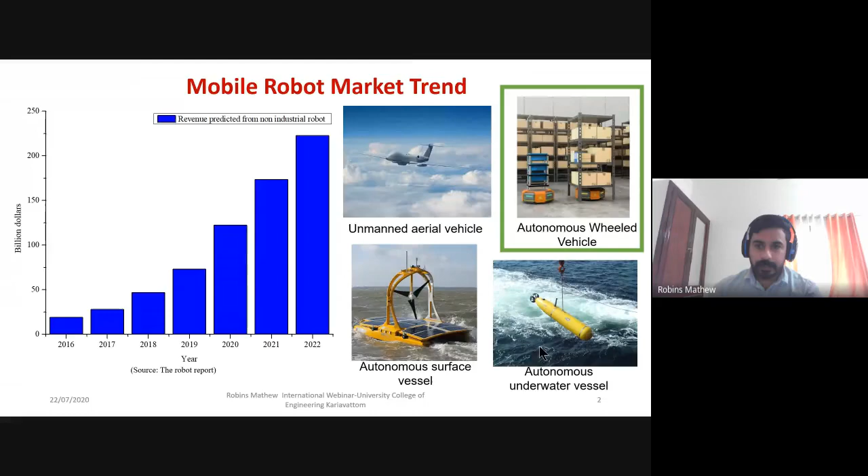However, the methods and other strategies which I discuss in this presentation will be applicable for other types of mobile robots, such as unmanned aerial vehicles, surface vessels, or underwater vessels. But I'll be using images of wheel mobile robots. So keep this in mind.

Coming to the major milestones in case of wheel mobile robots: research started in the 1950s, and by 2020 you have autonomous trucks and cars in the market. This research started with a very small scale robot used for a different purpose, not for actually controlling the robot as such. It was used for some other purpose in the 1950s, and in the 1960s, Stanford University came up with an autonomous vehicle, shown in this figure. It's like a puller cart, which we use for moving vegetables or other things in India.

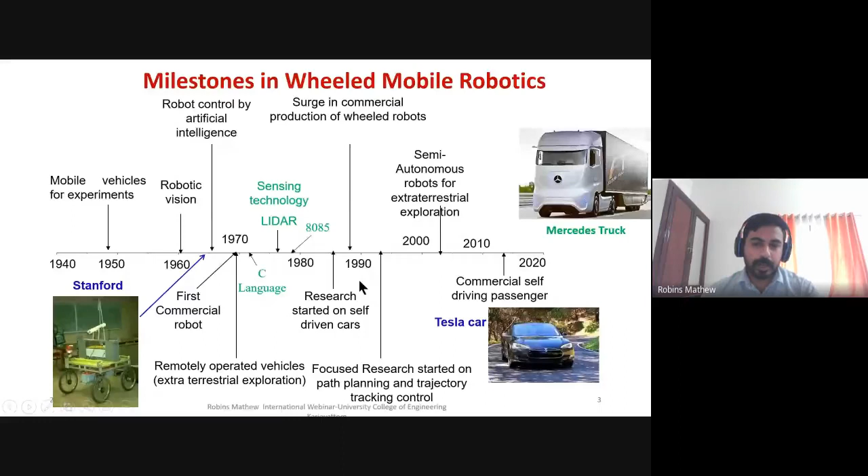When coming to wheel mobile robots, again there are different types, like the omnidirectional robot, where you have a robot with three wheels arranged on either side at 120 degrees in the body of the robot, and these wheels are specially made. It can be moved linearly in a straight direction, or in the lateral direction, using rollers attached to the wheels. By moving each wheel at a particular velocity, you can actually move the robot in any direction. So by controlling individual wheels, you can control the motion of the robot.

In case of the synchro drive robot, you have a normal wheel which is rotatable, and this wheel is arranged in a mechanism which can be used for turning the wheels. So by turning the wheels and rotating the wheels, you can move the robot in any direction.

Then you have the steerable wheel robot, where you have powered rear wheels. This is a car-like robot. Steerable wheel robots are car-like robots. You have powered wheels, and then you have steerable wheels. By steering these wheels, you can make the robot move in a particular direction.

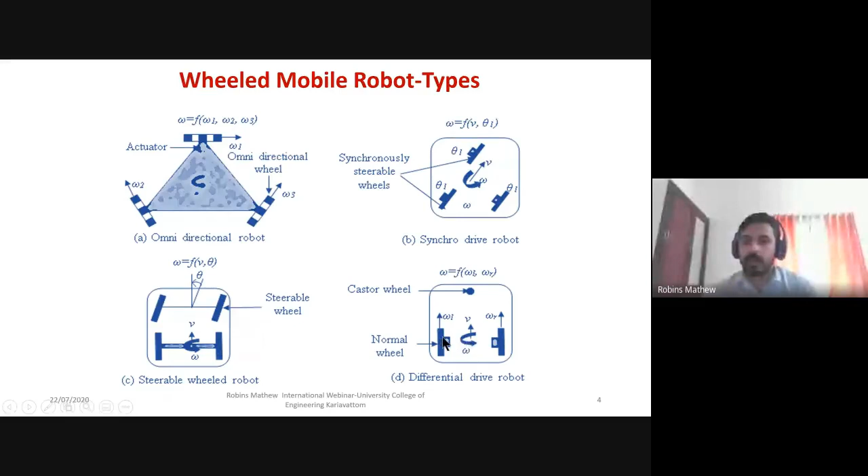Then you have the differential drive robot, where the motion of the robot is controlled by controlling the independently actuated wheels. So by controlling these two independently actuated wheels, you can control how the robot is moving.

The application sectors of wheeled mobile robots, as well as other wheeled vehicles, are in healthcare, agriculture, consumer goods, mining, defense and security and surveillance, transportation, etc.

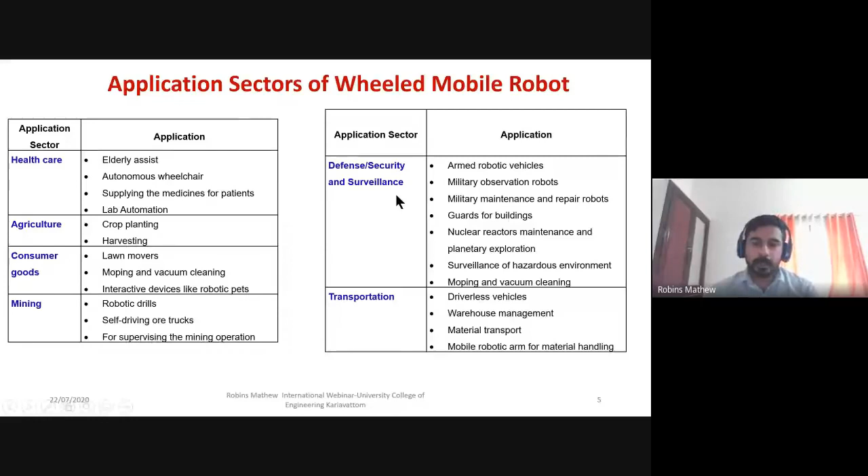So what is the market prediction? It shows an exponential increase both in the revenue as well as the application. Within 3 years, the use of mobile robots will grow by 300%. We expect that mobile robots will be available in our homes within 5 years. You may think I'm over-predicting, but it's actually the situation here.

Now we have robots like floor cleaning robots already available in the market within a price tag of 20,000 to 30,000 rupees. Anybody can purchase these robots. This price is going to reduce within 5 years and it will come around 10 to 20,000 rupees range, so anybody can purchase a robot.

And when I say these robots are going to be in your homes, I mean robots like floor cleaning robots, elderly assist robots, or any other human assistance robot, like lawn mowing robots. These robots will be available in the market within 5 years and will be there in your homes as well.

Coming to the relevance of these robots in a current pandemic kind of situation: in this situation you have a limited number of human resources available in the field, in your factories and automated facilities, other manufacturing facilities. This problem is especially faced by the biomanufacturing sector or bioprocessing labs where you need human presence to do the experiments and develop the products.

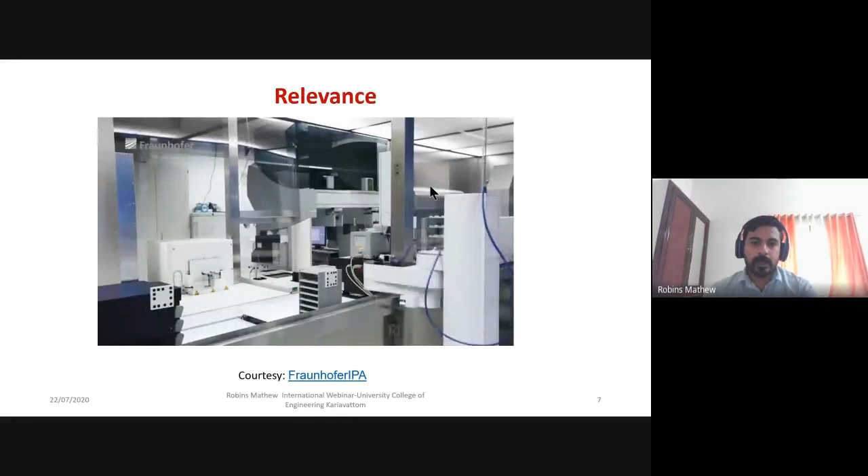You can see this robot developed by Fraunhofer, assisting a human in testing samples, taking the samples to another place, keeping the samples in an incubation facility, and moving it back to the original position and so on. This is an autonomous robot that's already in the market, which could do many things autonomously.

You can see how it is avoiding obstacles and other things and then going to the required destination. So this is the relevance of robots, the use of robots in manufacturing facilities and other facilities, other than commercial consumer goods.

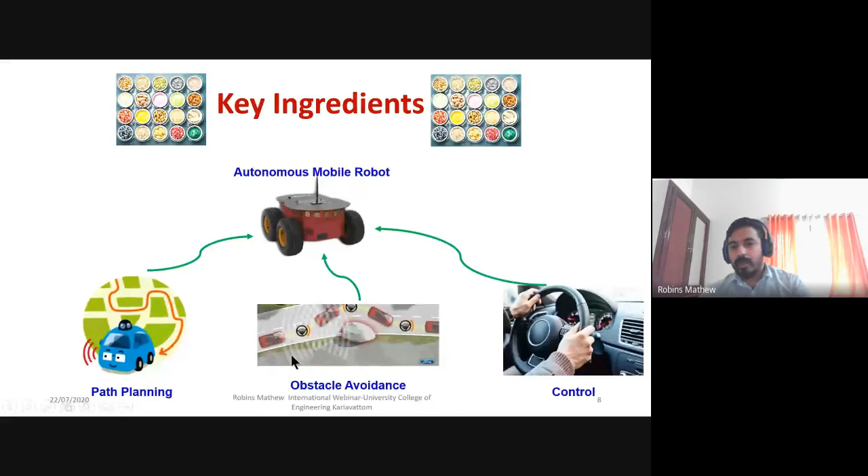So when you talk about autonomous wheeled mobile robots or any other robot, what are the key ingredients? For me, it is path planning, obstacle avoidance, and control. If you combine all these three together in a proper way, you can make the robot autonomous. I will explain each of these individual topics separately.

Coming to path planning, it's the process of finding a continuous and optimized path from a given initial position and orientation to a final position and orientation, avoiding obstacles. So you have a configuration space which consists of a starting point, a destination or goal point, and obstacles kept in between. We need to find the path from the starting point to the goal point.

There can be many paths like P1, P2, P3, P4, etc. However, we have to find out which is the most suitable path. P1 can be avoided because it passes through the obstacle. Then you have P2 and P3, which take a bigger route or move more distance than P4. So at last, the objective is to select P4. Somehow you have to find the path, then determine which is the optimized path.

Coming to the applications of path planning: when we talk about path planning, we always remember robot navigation. There are many other applications too—industrial robots can use path planning for pick and place operations or other tasks, and it's used in navigation apps like Google Maps. It's also used for finding how proteins are folded in biology, like how a chain of protein will fold and form a structure. Then you have the autonomous vehicle lane-changing problem, where again path planning is used, as well as animation in normal animation movies and other applications.

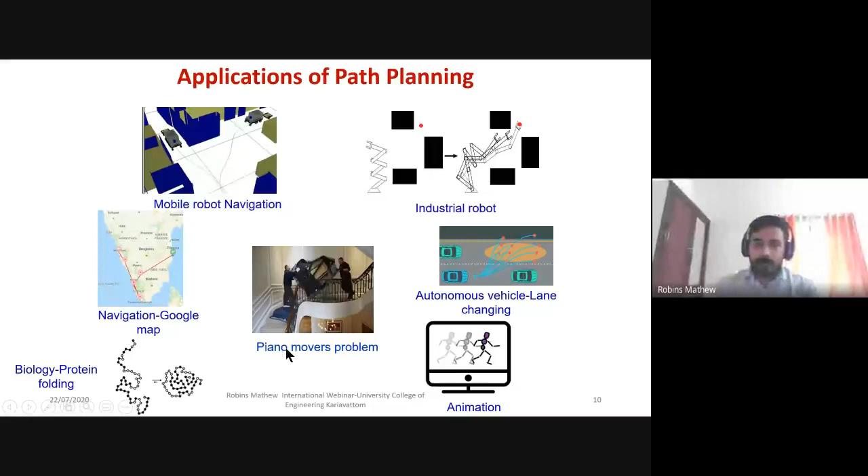Then you have the piano movers problem, which is a problem where a person wants to...

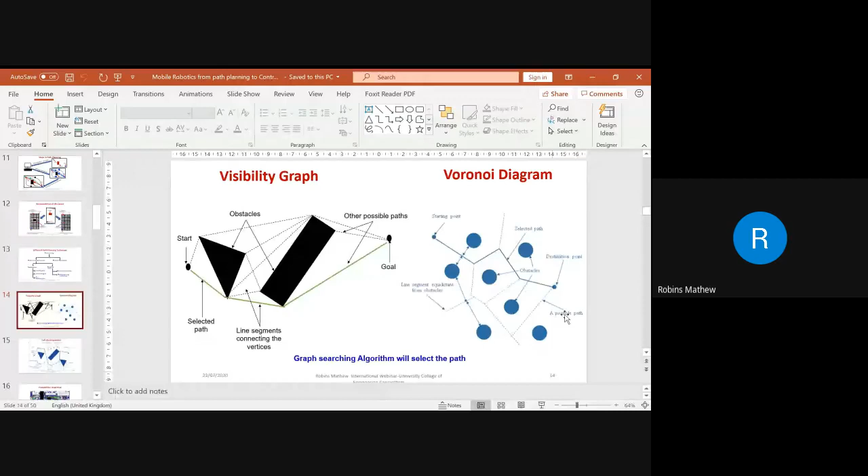So in case of the Voronoi diagram, you have obstacles in the environment, and you have to find a path from the starting point to the destination point. What this algorithm does is find the shortest distance between two obstacles, mark the center of the line connecting these points, and then draw a line perpendicular to that line connecting the obstacles. It does the same procedure for other combinations of obstacles, so each obstacle will have all its neighboring obstacles considered.

Then mark the center and draw a line perpendicular to the line connecting centers. This forms a structure consisting of boundaries of the area occupied by the obstacles, and these boundaries are considered as a connected graph. This connected graph is then used by a graph searching method to find the optimal path from the starting point to the destination point. So you can have a path like this, or like this, and many other combinations. The graph searching algorithm will select the best path.

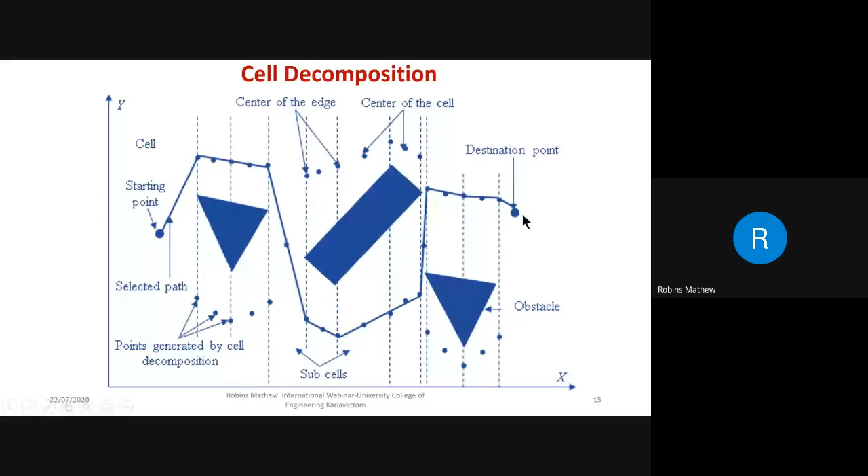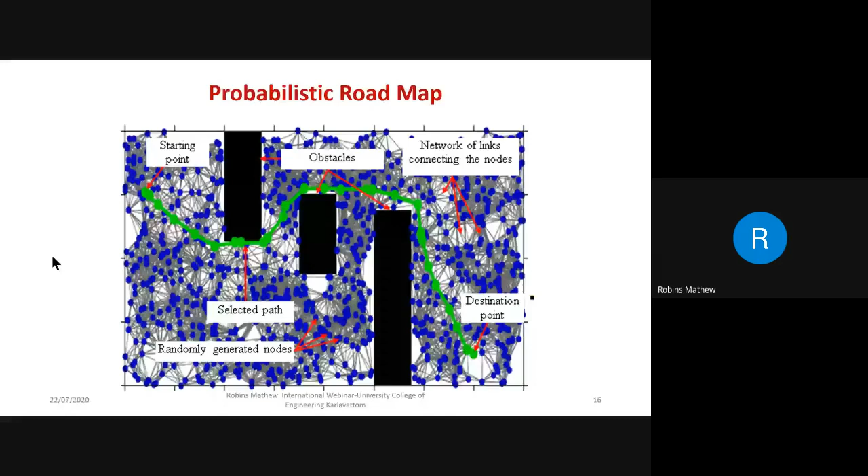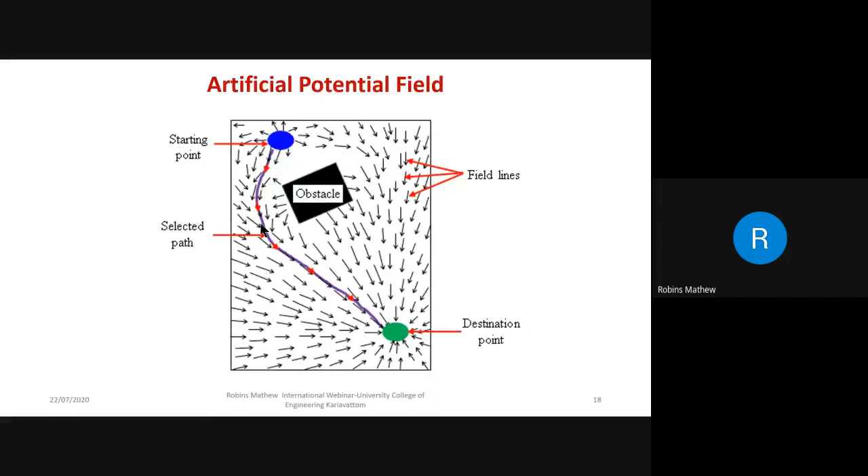These parameters can be determined by the user, so this weightage is a function of many parameters, not only the distance between the two nodes. Once you put the weightage all over this graph, you can find out which path has the lowest total weightage, and then ask the robot to move through this path.

For finding which path has the lowest weightage, we can use many algorithms like Dijkstra's search algorithm, D-star algorithm, A-star algorithm, or any other path planning algorithm. There are many other algorithms, such as A-star and D-star.

Okay, one minute. Hello, sir. Yeah, you can continue. Okay, okay. I thought something happened in between. Okay, no sir, so okay.

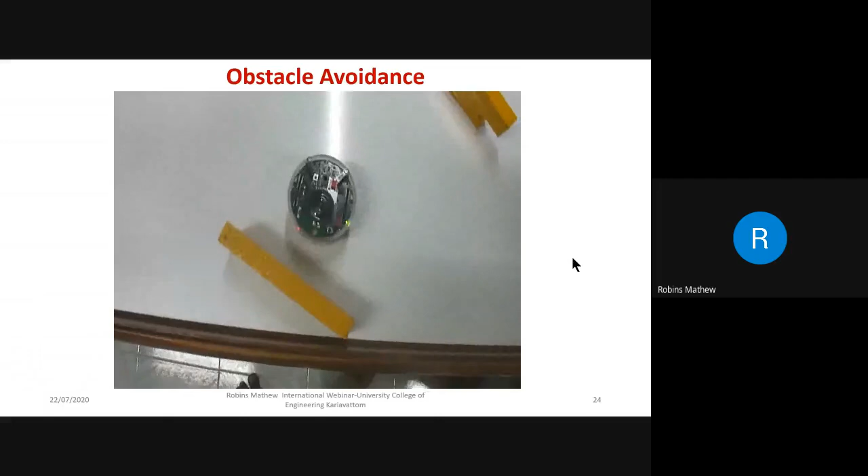Okay, this is just obstacle avoidance, avoiding the obstacle only. It's not the actual obstacle avoidance which we need.

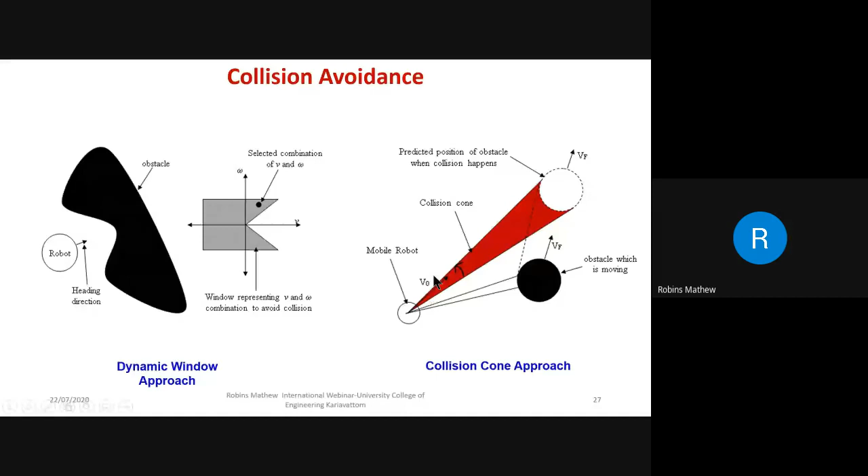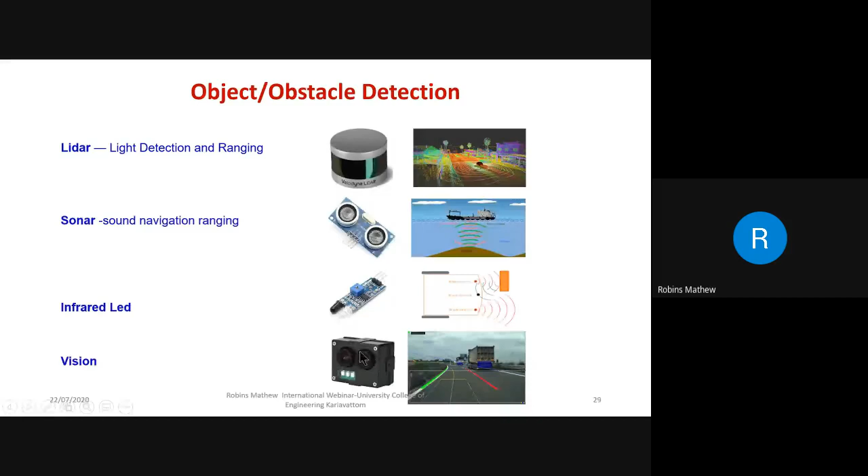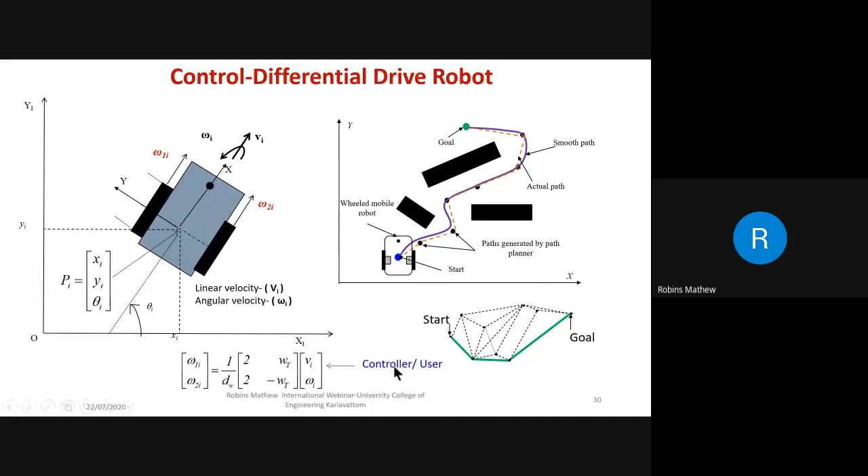For this purpose, you can use an open loop controller. Here you have a robot which has to go through this rectangular path having length L and width B. There is a stylus kept behind the robot to trace the path tracked by the robot. This is again a differential drive robot, and you have this control equation which controls the motion of this robot.

For open loop control, what we do is move forward for B by VI seconds, keeping omega 1i equal to omega 2i. This means it will move straight forward for B by VI seconds. VI is determined by the operator, and omega is also determined by the operator.

Then once it reaches here, turn. So for turning, you have to keep omega 1i equal to minus omega 2i, and then turn for theta by omega I seconds to make this turn. So if theta equals 90 degrees, it will make a 90-degree turn, and this process will continue till it reaches back to here.

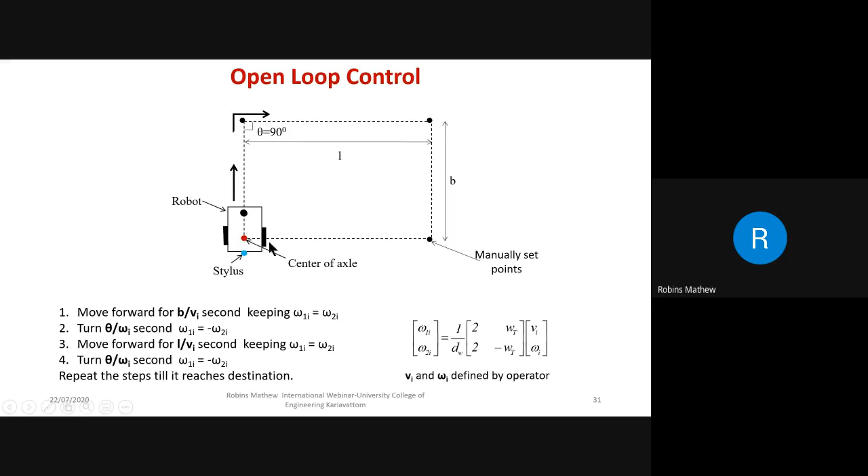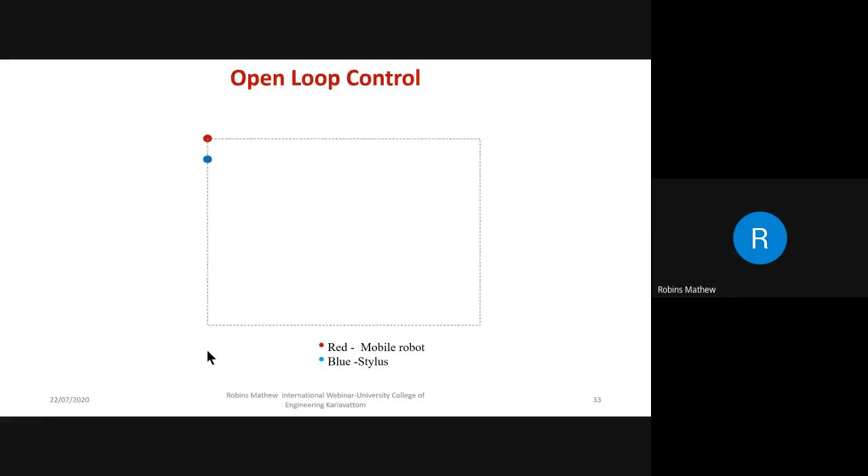So the motion will be like this. You have a robot marked as a red point and stylus marked as a blue point. It moves straight, then when it rotates, the stylus will rotate like this, making an angle here. This process will continue.

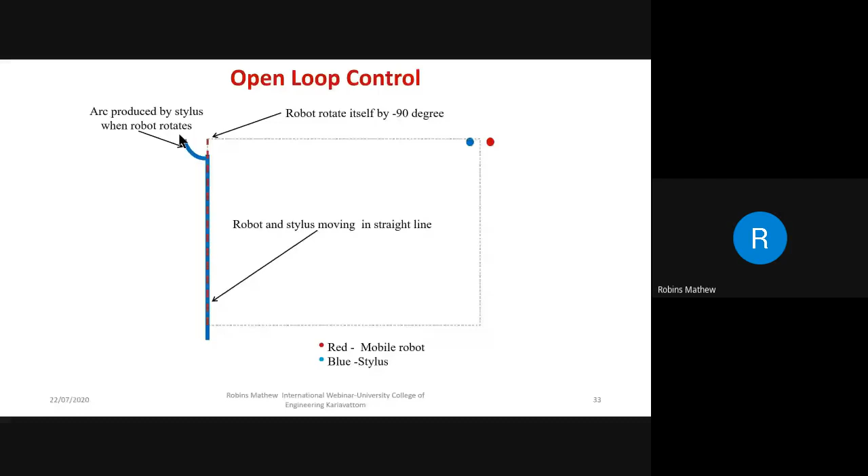We have tested this open loop control method for controlling the robot through circular path, triangular path, and rectangular path, with the stylus attached in different places like behind the robot as well as at the center of the imaginary axle connecting the wheels.

When we keep the stylus behind the robot, you get this kind of situation where the stylus takes a path outside that of the actual path of the robot. This is the simulation, and this is the actual experimental trajectory left by the robot, meaning the stylus.

When you have the stylus placed at the center of the robot, you can see simulation here and experiment here. You can see that when the stylus is kept at the center, we get a much better triangle or rectangle, and you have the circular path here. Again 200 mm, this is traced by the robot.

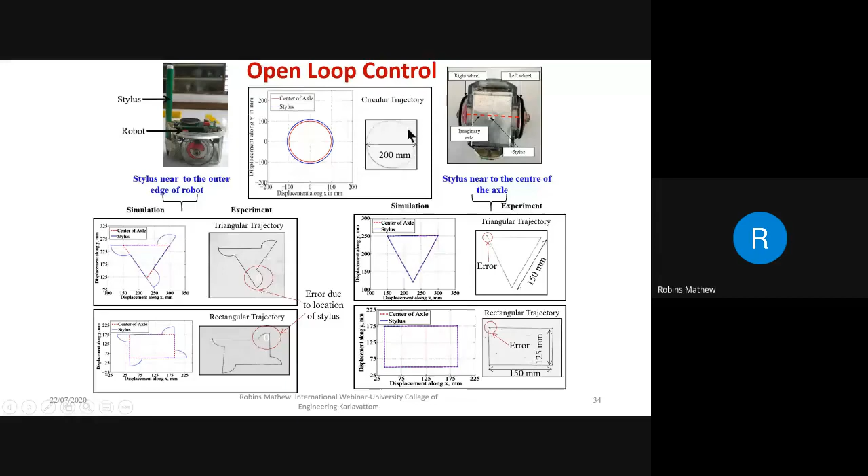I will show the experiment conducted for the circular path. Here I am giving an input of 100 as the radius, and at an angular velocity of 12, I am making the robot move. You can see the robot is making a circle.

So by moving individual wheels, by changing the individual wheel velocities, you can control the path taken by the robot. In this case, it is again you can find out it's actually 200 mm, diameter is 200 mm.

So that was about the open loop control. Now coming to the closed loop control, you have a classical control approach where input is given to the controller. This input is the reference path which has to be tracked by the robot, and this reference path will be selected based on the current position of the robot and the available path.

So you have some kind of reference point coming out of this particular module itself, the path as a whole. Then this reference position, which will be changed and varied as it moves on, will be compared with the current position of the robot, and a posture error will be produced.

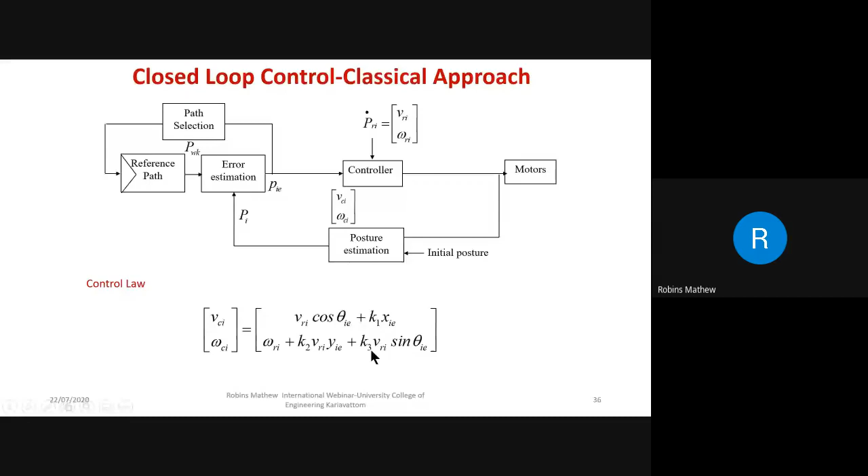Then instead of that standard controller, a classical controller can have an ANN based for controlling the robot. In the case of ANN, you train the ANN for controlling the robot. Initially, there will be a training set, and then you train the data, the robot, and then use that for actually controlling the robot.

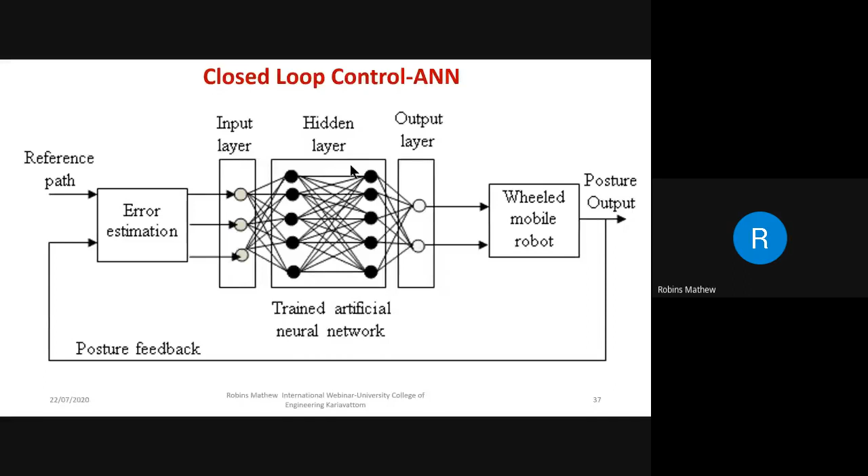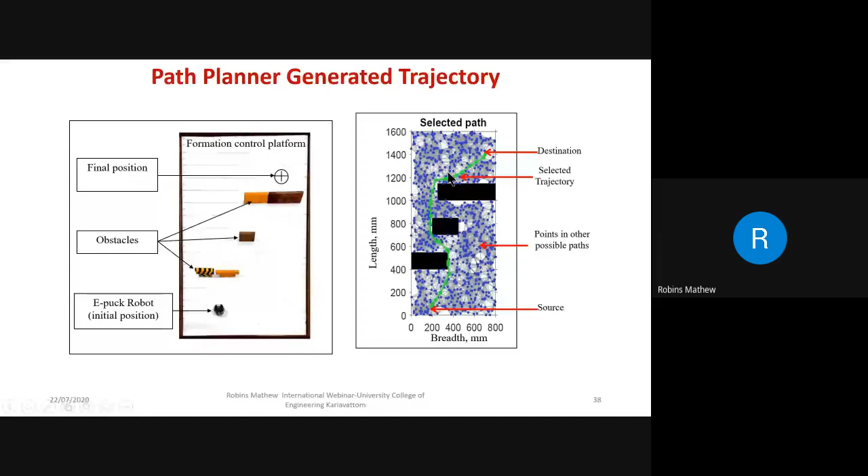Then this is a scenario where you have a robot here, you have to go to the destination point, and obstacles placed over here, over these positions. And this is a video from the overhead camera.

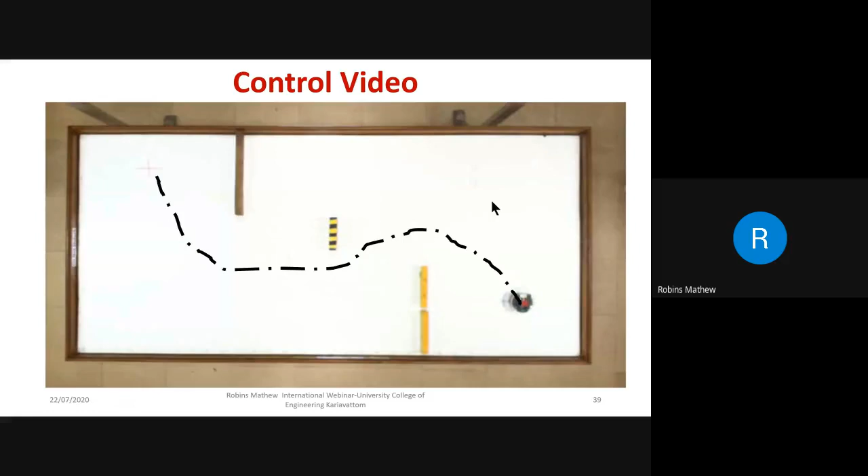You can see the robot starting from here, then moving along the planned path, and going to the destination point. Again, that classical control approach was used here for controlling the robot. There is some error. This is because of the odometry error for estimating the position of the robot, and this estimate of the odometry gives us the feedback. Because of that problem, it's having some small error here.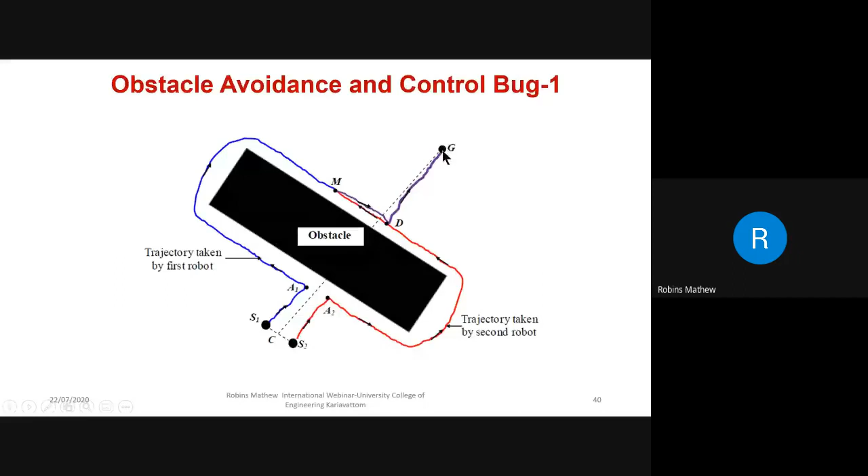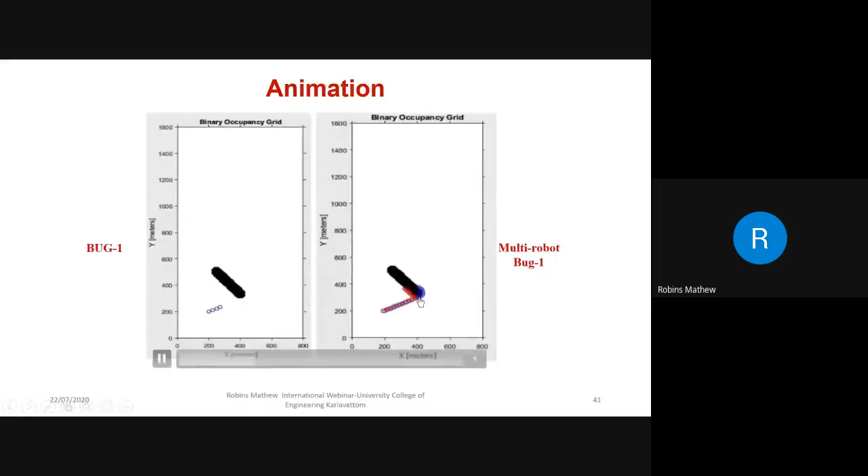I'll show an animation of the same. You have two robots here, going to the destination point over here. Once it detects an obstacle, both will move. In case of the Bug-1 algorithm, only one robot will move. Here, they meet at this point and come back to here. In case of Bug-1, it takes a full circle up to here, then comes back, then moves.

So this new method will do the obstacle avoidance in a much faster and more efficient way.

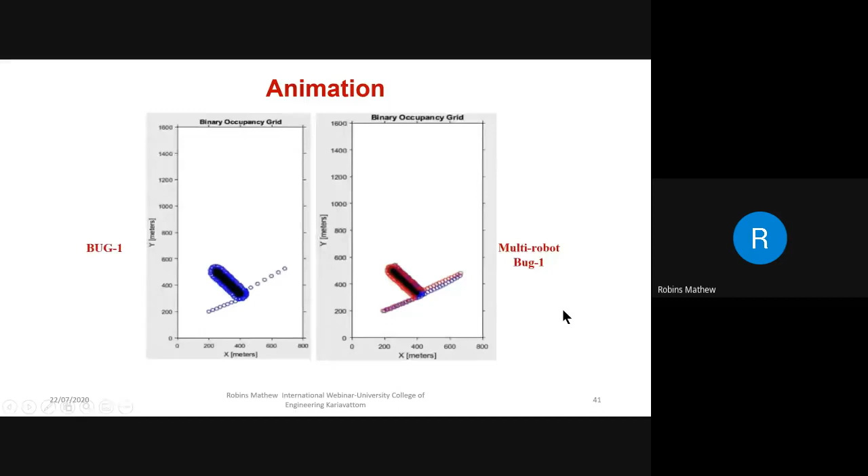Now, I talked about the classical control approach as well as learning-based control approach. There can be other control approaches as well, like reinforcement learning, which can be utilized for control. It's the idea of having a robot learn by itself how to accomplish a task. So for RL methods, I'll show you an example.

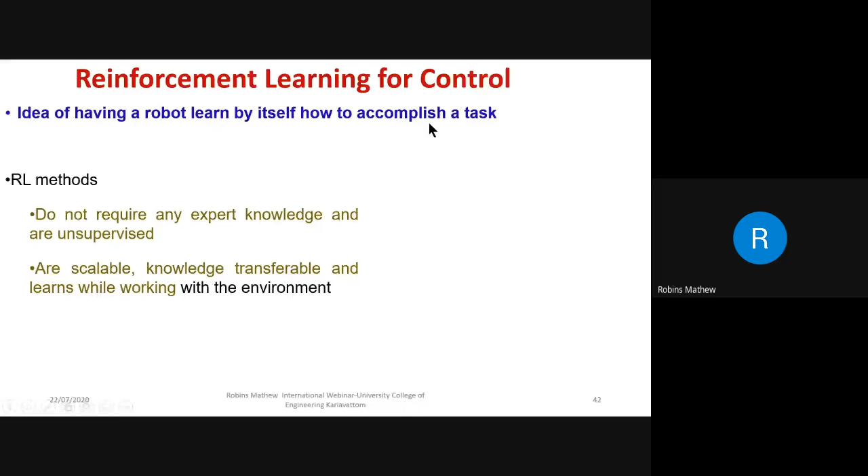Here the robot has to move from the starting point through a corridor, and it has to move in such a way that it won't hit the walls. In this case, the robot will be trained over each iteration on how to do this task. It will learn by itself actually. As the iteration increases, it automatically learns and completes the task. So it doesn't require any expert knowledge and is unsupervised. It's scalable, knowledge transferable, and learns while working with the environment.

That is the advantage of reinforcement learning. You don't need to find out a control strategy. You can just give some conditions and then ask the robot to learn by itself. Here, the simulation is used first to train the robot, and this will then be used in field real operations.

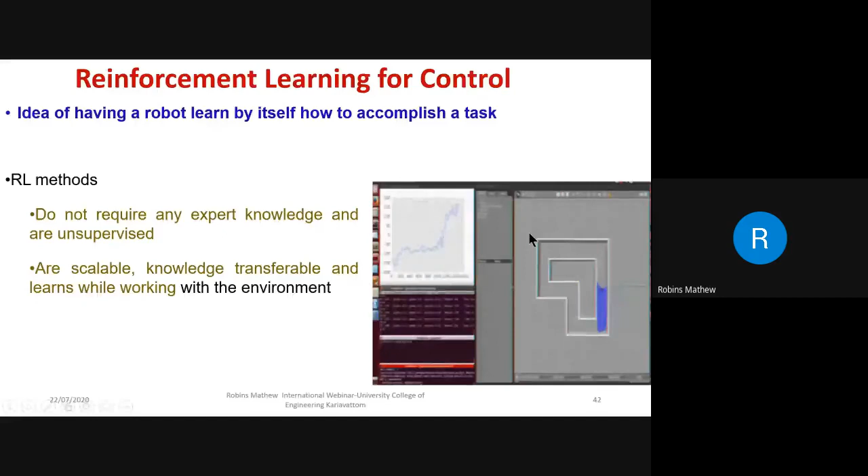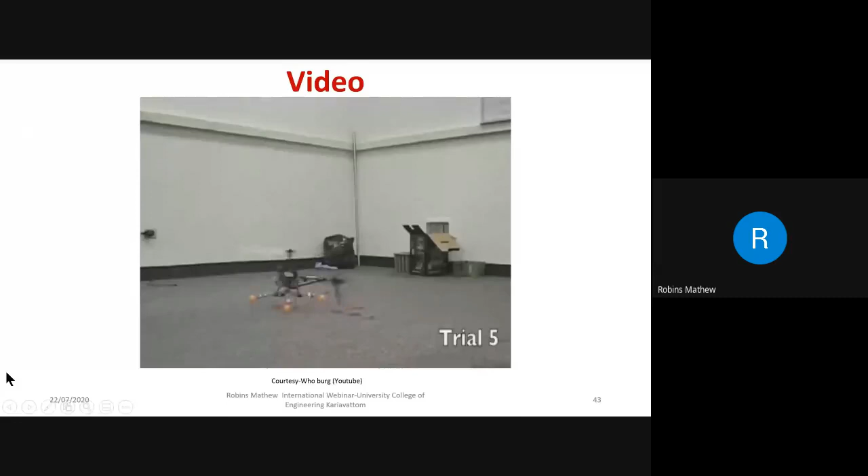Let me show a video of using RL for controlling this helicopter-like robot. In each trial, it is going to fail, and it learns, and as the iterations increase it automatically improves, and at last it will stabilize itself. So this is the RL method used for controlling a helicopter-like robot, a drone.

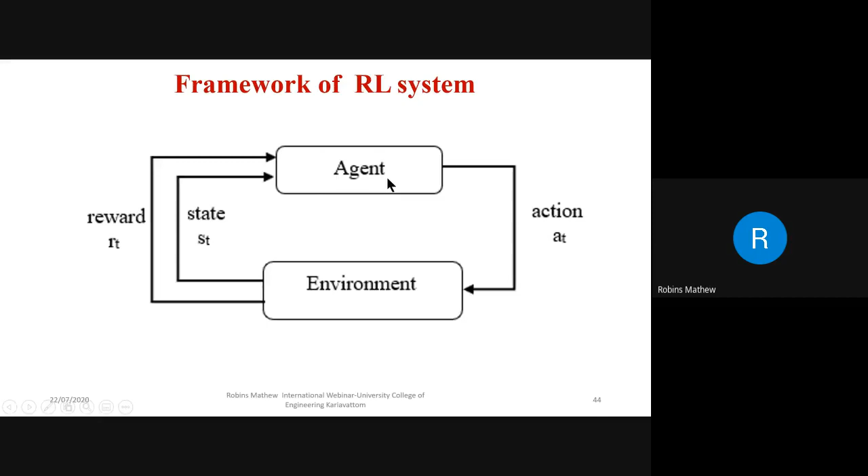And this is a framework of the RL system. You have an agent which has to take the control action. This action is going to affect the environment in which it operates, and this will create a new state and a reward to the agent. Based on the new state and the reward it gets, it will understand whether the decision taken was favorable or non-favorable. Based on this, the agent will learn by itself and improve to make a good action. This, when carried out over many iterations, eventually makes the agent learn how to do the task in an efficient way.

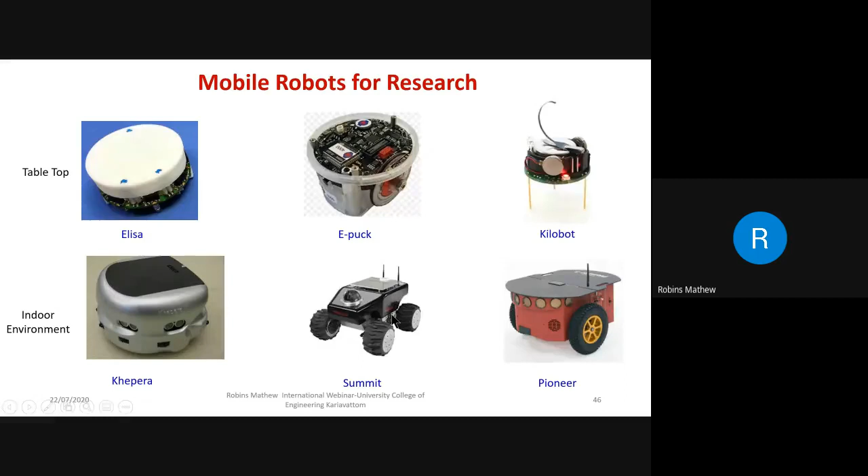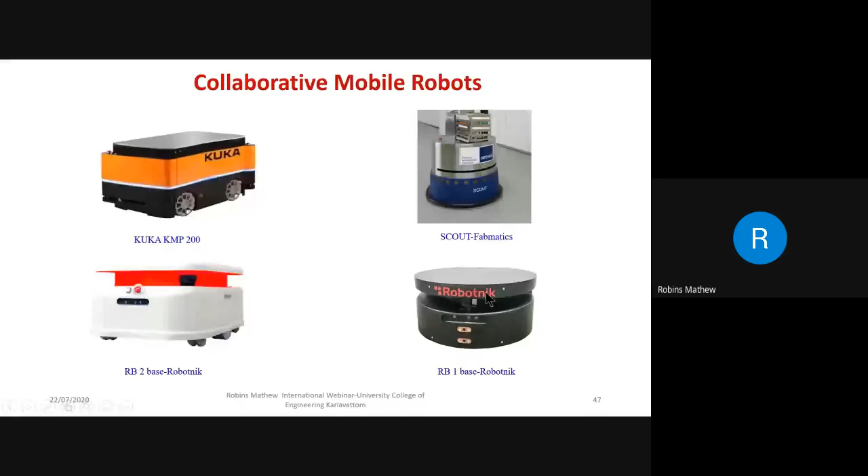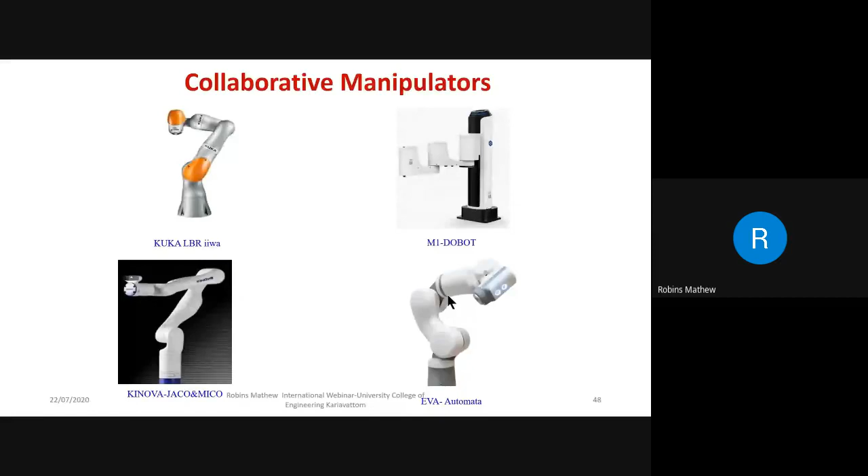Well, thank you all, and you can ask any queries if you have. Then again, I am going to play this video from Fraunhofer, and let me ask this question to you: what are the techniques involved to make this robot autonomous? I think with this PPT, you might have understood certain techniques which can make this happen.

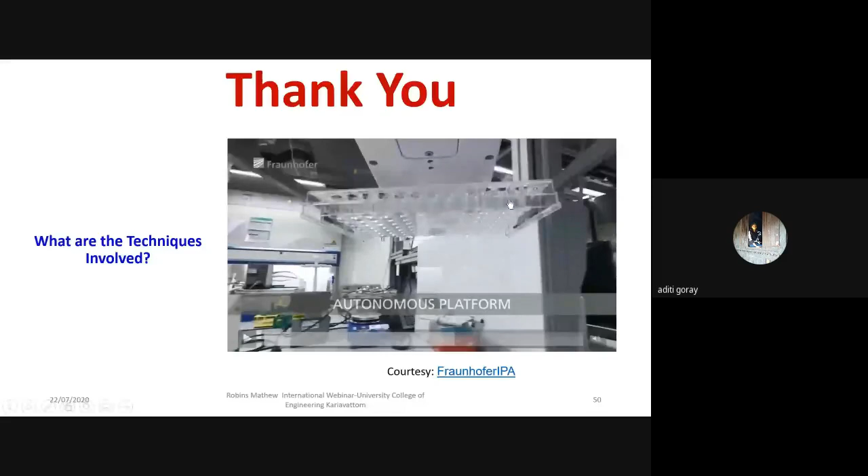Sir, we actually had a question during the session. It was by Navya. Okay, Thomas. Sir, can you give me one minute, let me see what that is. Could you... no.

Are these algorithms applicable for both static and dynamic environments? I think I have answered this after that particular slide. For dynamic environments, there are collision avoidance algorithms.